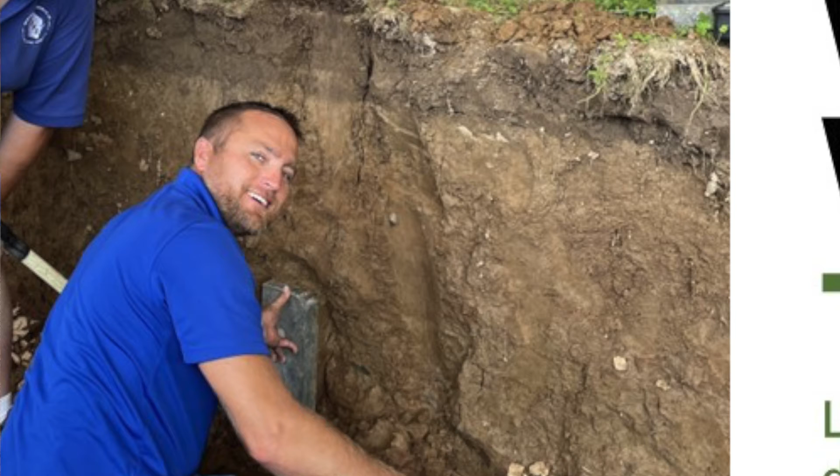And for those of you that really want to know what the next soil exam, what the next monolith is going to be, this is a picture of it. So, hurry up and do a screenshot, snap that, and you can study it if anybody needs to take the next soil exam. So there you go. Nope, too late. We're on to the next one.

So anyway, mobile home connections. One of these questions came up: who can connect a mobile home to a POWTS? So you're at a trailer park, manufactured home park. One trailer disappears, another trailer comes on. Who can make that service connection underneath there? It's a complicated answer. If a building sewer is present, then a master plumber restricted or master plumber can connect to it, or a journeyman can work on it too. If there's no building sewer, then only a master plumber.

From what I've heard, a lot of these pre-manufactured homes are being shipped without any building sewer underneath them. The plumbing goes through the bottom floor, and that's it, because they're not pre-plumbing them since they don't know which side of the building the sewer is going to go out. They don't know if they want to stub it out by the door, the back side, or the end. So they're just leaving it. If there is a building sewer underneath that manufactured home, the connection can be made by a restricted. But if you actually have to construct the building sewer, then it has to be done by a full master plumber. So either or, depending on what it is under there.

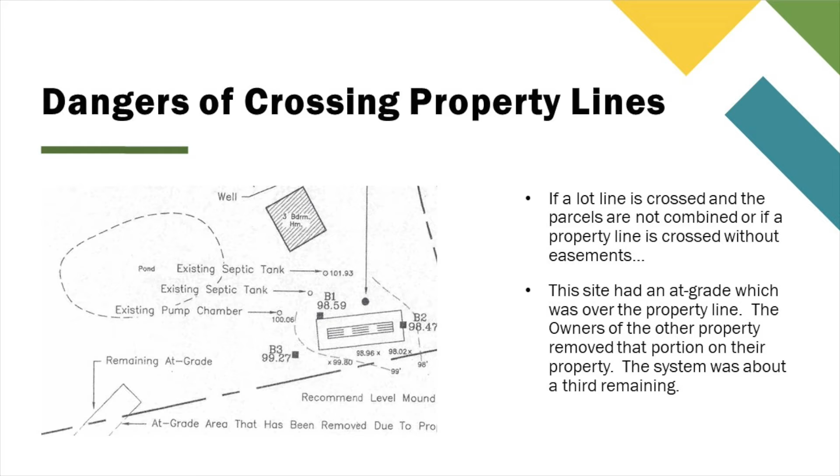So, what are some things that we look at? Well, one of the ways to do it is an easement. So, an easement basically gives access to another parcel.

And so how do we handle those? Well, we would like to say, if you own two, like the previous example a couple slides ago, where we looked at a guy who owns 3 lots but it's one tax ID, you should probably combine those. I mean, you can suggest it. We can't make it a requirement of issuing a sanitary permit or doing the plans. We can suggest it to them and say this would be for your benefit to do, but it's at their own detriment if they don't do that.

You know, requiring an easement, we've been told, well, years ago I was told from the attorney general opinion that we can't have an owner do an easement to themself. It's the strawman principle. It's like entering into a contract with yourself. You can't do an easement to yourself, but it'd probably be better to combine lots if they're not combined. But how do we handle easements?

So this gets into the issue of when we see a property come through with an easement on it, how do we handle those? Well, each easement can be different, as an individual can be. So some just require access, others limit use. So some may just say, hey, I've got the right for 2 rods width along this 40 acres to access my other property. So what does that mean? It might be walking access, might be a road. So it depends on what that easement allows them to do.

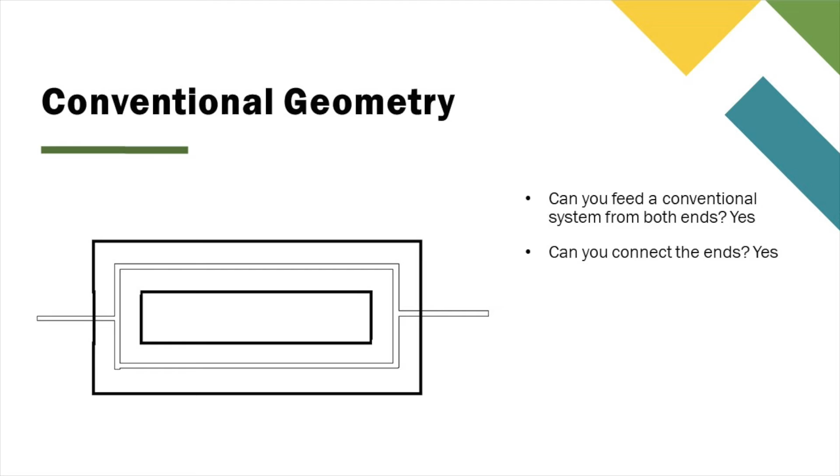What about an at-grade recore? So we had this question come in. Can I rebuild an at-grade? Can I do a recore like I do in a mound? Well, as an ISD, a submitter, you can propose basically anything. You have to show us that it meets the code. So even though it's not a component manual thing to do, you could do it as an ISD. You can propose a wide range of things. The problem that we had with an at-grade is that, in theory, yes, I can remove that material and rebuild it.

But unlike a mound, the biomat forms in a mound typically between the aggregate on top and where that sand interface is, much farther above the natural soil. And so those are sort of easy to take out the guts of the mound, so to speak, that biomat, that contaminated gravel, replace your distribution network and cell, and then cover it back up again.

The issue that we have with an at grade is that the biomat is at that aggregate bed and the natural soil interface where those two connect. So removing that biomat, which is possibly in the gravel and into the natural native soil, is a problem because now we're scraping that natural soil. When we do that, obviously, if it's a ponded system, it's going to be wet.

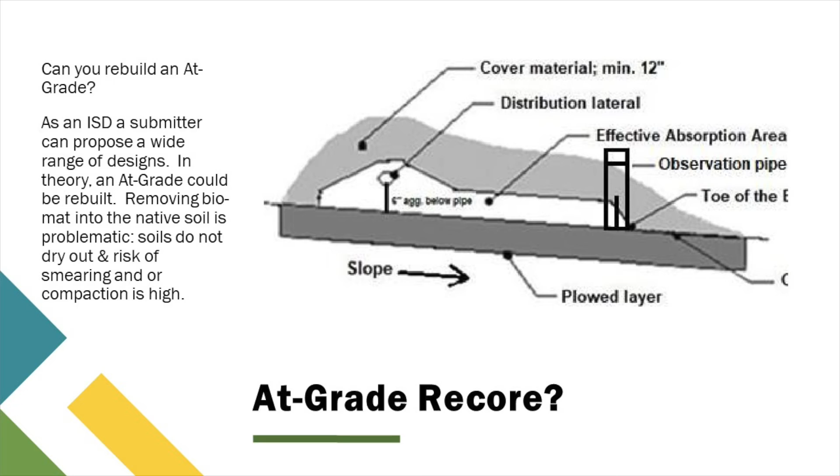But the question is, where can a garage floor drain discharge? So a residential floor drain is listed in table SPS 382.38-1. It lists the floor drains as discharging to, well, it's got a couple other ones that are combined sewer, but a sanitary sewer or a POWTS. So you can go down the sewer line with those. They may also be able to discharge to grade, but that's regulated by the DNR.

So I know we've had various people over the years that have talked to the DNR and gotten an exemption in writing from them that you can discharge to grade. That is a touch and go. Some DNR people have said, okay, that's not a problem. Other DNR people, because of the potential for contamination from whatever drippings off your vehicle, either oil or gasoline, say it's not a clear water discharge and has to be regulated through a permit. So depending on who you ask and when you ask, you may be able to get a piece of paper from the DNR saying that's okay.

Commercial floor drains are a different story. So if you've got a commercial garage, they're probably industrial wastewater and regulated by the DNR. There's a lot more propensity for vehicles to be stored and having mechanics work on them. The probability of having oil or antifreeze go down the drain is high, and those are most likely going to be industrial wastewater, and those can't go into a POWTS because we're going to have a contamination source, hazardous materials going in there, but those could go to a holding tank.

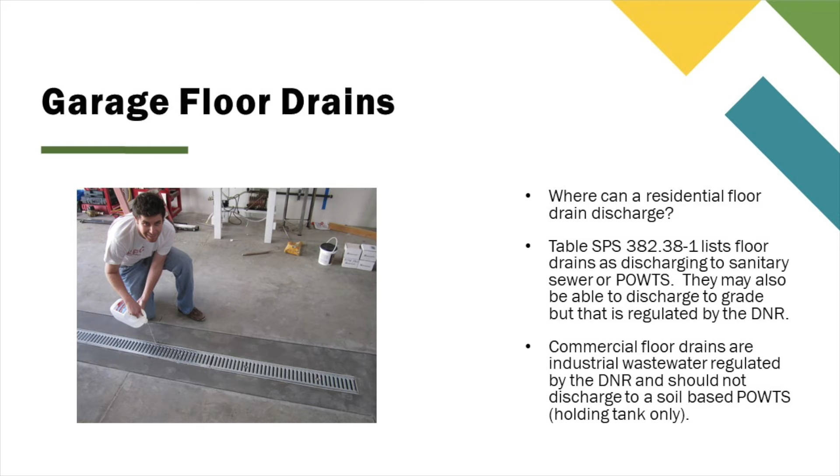So we're talking about recores. Probably should have had the slide next to it, but the question is, what about mound recores? When is it a good option? So we've had some of these come through here. I want to do a mound recore. Well, we have to make sure that the failure is at that distribution cell sand interface.

So where a recore makes sense is that over the years the biomat has eventually built up, it's plugged, the mound's 30, 35 years old or whatever, and we can core that material out, put a little bit of sand back down if we need it, add our distribution network again in the gravel, and put it back together. However, we've been running into some situations where it's not always up in that area.

Something occurred: either the soil test missed the structure issue, or this sort of leads towards possibly some issues during construction. Plowed when it was too wet, driven on and compacted while it was being constructed. Something happened during the construction phase, or there's a problem with the soil to start with. So even recoring it out on top isn't going to solve the problem down below.

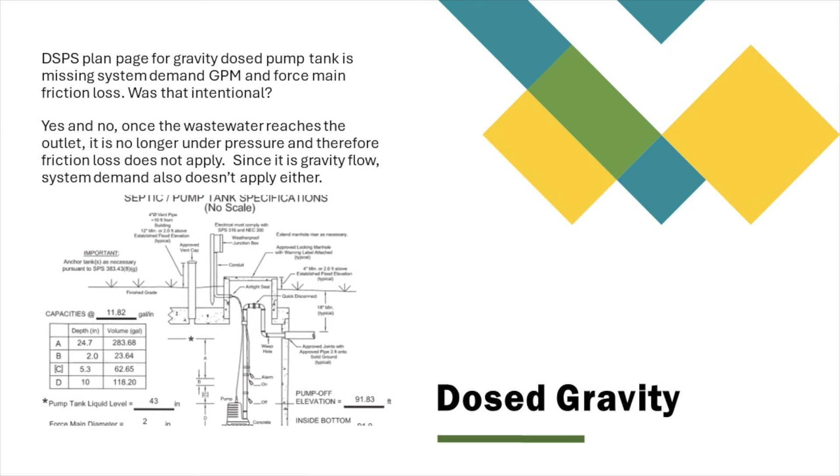So that brings us into total dynamic head and what are some of the calculations. So if we do have to do that, we've also had some questions about, again, calculating total dynamic head. We got some newer folks out there that are not always familiar with it. So I thought this would be a good time to go through some of those kind of things.

So total dynamic head is made up of basically 4 different parts. It's made up of distal pressure, so whatever your pressure distribution network requires. We have some network losses, we calculate as 30% of distal pressure. Vertical lift, which is the pump off to the highest point,

and then friction loss. As you have higher and higher velocity flow, you're going to have more and more friction against the walls of those pipe. It's going to be harder and harder to push. Also depends on the size of the pipe. So obviously, if I'm pushing at 40 gallons per minute through a 1 inch pipe, I'm going to have a lot of friction loss as opposed to 40 gallons per minute through a 6 inch pipe, for instance.

So during plan review, make sure that you check the calculations and verify the pump can meet the demand at the total dynamic head. So that's why we have the pump curves. You look at whatever the TDH is calculated, move it over to that line, look down, and verify that gallons per minute is being met.

Also during inspection, it's important to verify the elevations. Sometimes people get a little happy with their digging and the tank goes in deeper. And if you're close to that pump curve, you may need to make sure that they didn't dig in too deep or the system got moved a little bit or something happened, or the building sewer came out of the other side of the building and now you've got a longer force main. If you're close, check those numbers again, make sure that you're still within that pump curve.

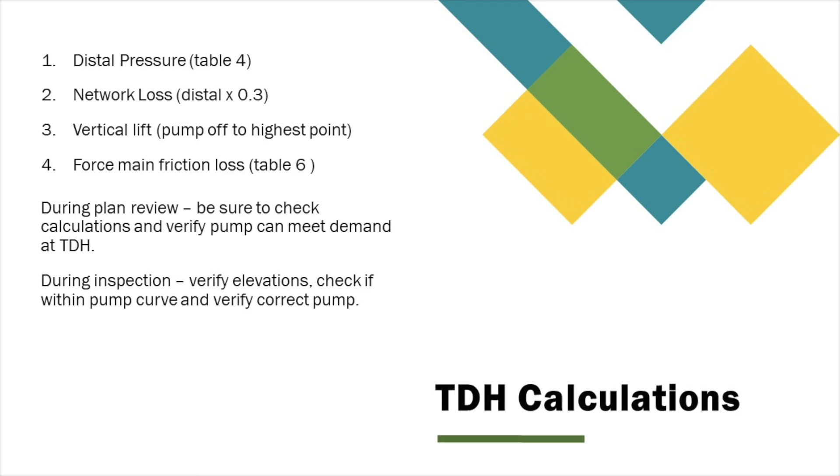So what are some, a little more detail? What are the parts? Distal pressure off of table 4. So this is their discharge rate, depending on what the size of the orifice diameter is. We require at least a 2.5 foot pressure. There may be some that are higher, such as a 5/32. You're going to have to use a 3.5 for a pressure. If you use 1/8 inch, it would be 5 feet of pressure would be the minimum required. So depending on which one, you're going to have a certain distal pressure.

Network loss, that's just for fittings, bends, elbows. We just figure an extra 30%. So you just add on, take your distal pressure times 0.3. So if you were using 5 times 0.3, you're going to have an extra 1.5 foot of pressure. So network loss is just distal times 0.3.

Vertical lift is, like I said, that gravity situation before, if we're only pumping to that outlet, you're only going from the pump to that outlet, and then if it's downhill from there, or if you're pumping up the hill to a mound or pumping up to a high point and then it goes over, it's whatever that high point is. So you have to determine whatever the highest point is. In this case, a mound would be the lateral invert. So that's the highest point you have to lift to.

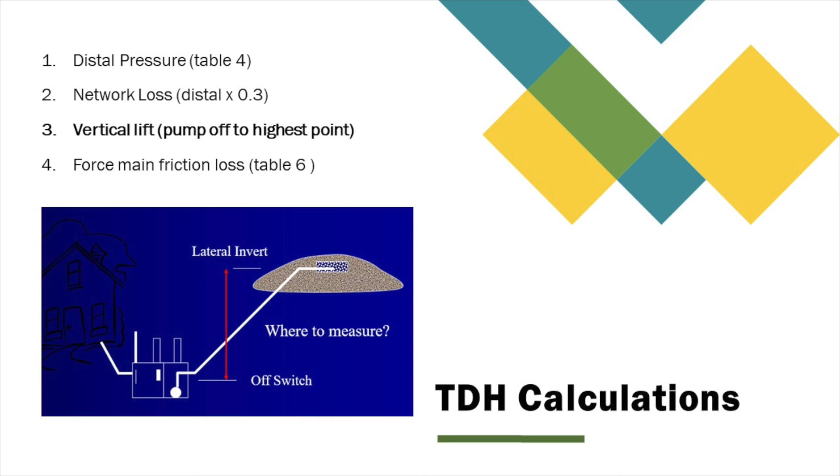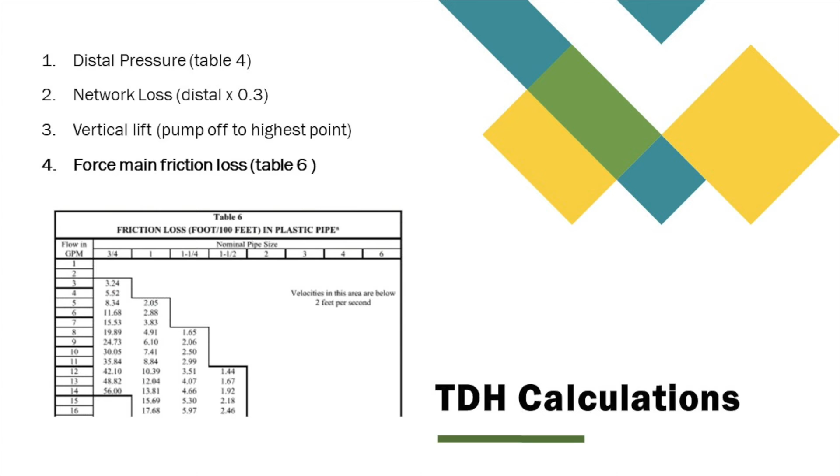So distal pressure plus network loss plus the vertical lift, and then the last component here would be your force main friction loss. So whatever your flow is in gallons per minute that's required, you would look at, and I don't really have part of the chart here, but then you look at whatever your pipe size is and you'd get a number here, and that's your friction loss per 100 feet of plastic pipe. You can extrapolate between the two if you're in between, or you can just take the higher number to make sure you're in. Hopefully, it's not going to make a difference where you're going to be right on that pump curve, but if you are, you can calculate that out.

The next question we had pop up, I had a county employee ask, he wanted to do, I think, a soil test for an acquaintance or friend of his, and said, where exactly can or can't I do a soil test on the side? So SPS 305.33(6) lists the requirement as a CST as an employee of a local governmental unit cannot perform soil evaluations in a county that they're employed in or adjacent counties.

So the way it's worded is basically if you share a border with that county, you can't work in that county. So, for instance, if you work in Door County, the only county that you share a border with is Kewaunee. So you cannot work in Door or Kewaunee County. If you're in a county that touches a lot, for instance, let's pick on one, let's say Sauk County, you cannot work in Sauk, Juneau, Vernon, Richland, Iowa, Dane, Columbia counties. So it's whatever county that you share a border with.

Whether or not Adams, I'd have to look at the map to see if they share a border. It looks like they're kitty corner. But it's whatever you share a border with. So you'd have to basically be one county away. So if you're in Sauk County, you could work in Marquette, even though it's fairly close. You don't share a border. Monroe County, you could work in. You don't share a border. As long as you're not sharing a border, you could hop over to that other county. So just something to be aware of if you are a county employee, what that requirement is.

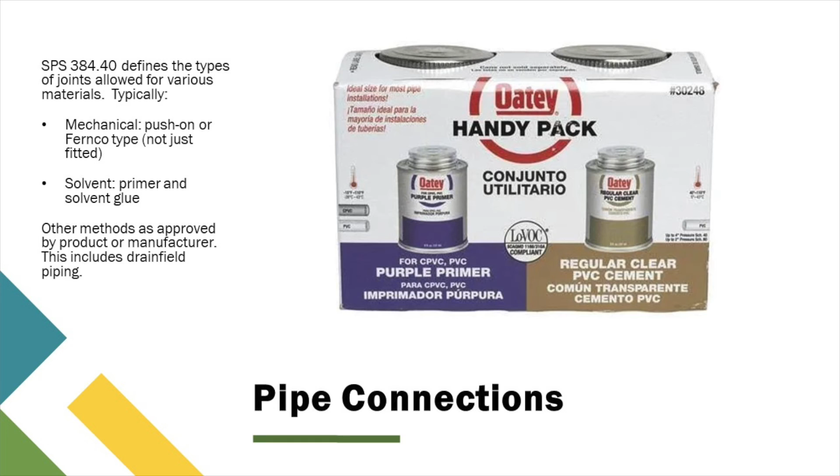As part of joints, make sure you know the difference between drain, waste, and vent versus pressure connections. We see this once in a while out in the field, that drain, waste, and vents are for only non-pressurized pipe, gravity. A lot of times the part that seals inside the fitting isn't very much. And so it's all right if it's not under pressure. There's enough contact area for the glue to hold if it's just a drain or a vent.

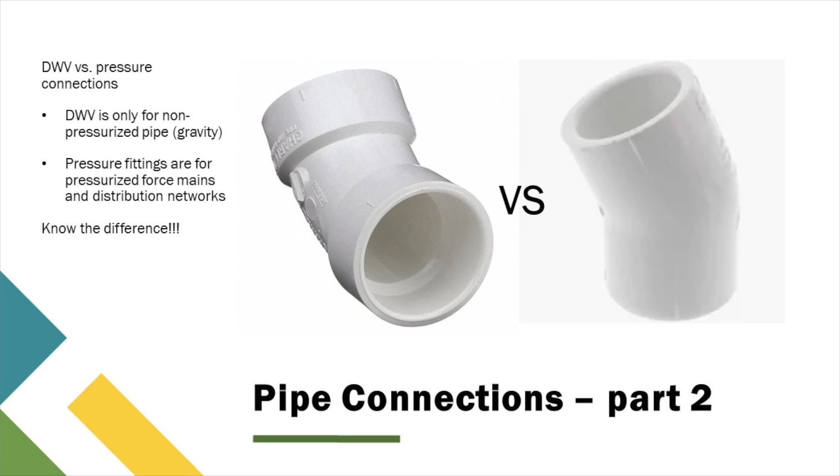But if it's under pressure, you need more contact. And so pressure fittings are usually a deeper socket. There's more sidewall for contact area for the glue to hold. So make sure as an installer and an inspector that we're using the right fittings there. That we're not using a drain waste vent fitting, that we're using a pressurized fitting for pressurized force mains and distribution networks. So make sure you know the difference on that for your pipe connections.

Private interceptor sewers, had some questions show up about that. When exactly do we have to look out for those? Private owned sewer connecting two or more buildings not controlled by a public authority. So, if it's the same building, two of them coming out, that's not defined as a private interceptor sewer. It functions as much, probably should still do the same things, but it's not called a private interceptor. But if it's two or more buildings that are connecting together, then it's a private interceptor. And if you're 4 inches or less, it can be reviewed as part of the POWTS submittal. They don't require a general plumbing review anymore. So it's been that way for a while.

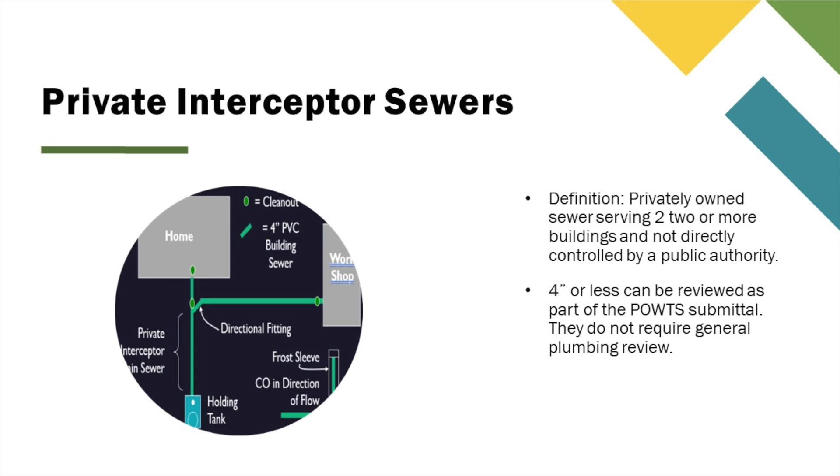But does something need to be recorded on the deed showing a private interceptor? If serving more than two one or two family dwellings and their accessory structures, then yes. So if it's just like this, a home and a workshop, no, nothing needs to be recorded. But if it's more than two one or two family dwellings and their accessory structures, then yes. We had one that came through where they put a drain in a bunch of storage buildings. Each storage unit was a separate building. They had it plumbed for a bathroom, I guess, or something. And so all these different sewer lines are all connected together. Those are private interceptors that had to be recorded on the deed.

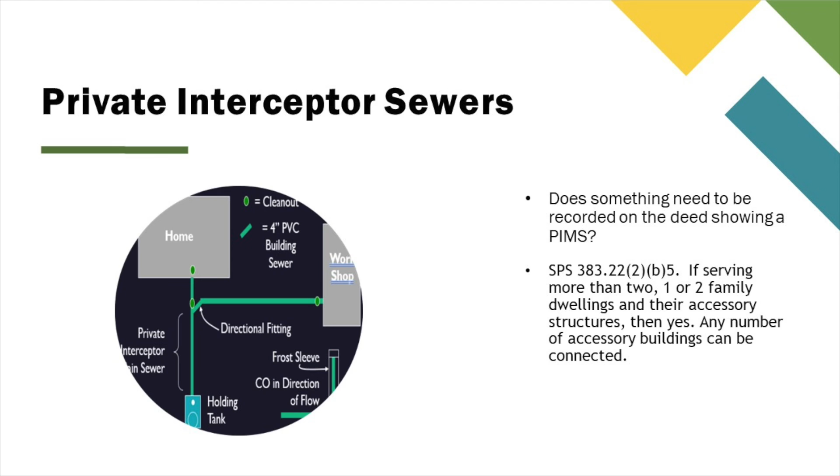And a lot of times, nationwide, we've seen some things come through where they're having some problems with them. They're actually considered hazardous waste, especially those that are heavy into the nails or heavy with the chemicals. So be aware that not all beauty salons are the same. If they're just doing haircuts and a wash, or it's a barbershop haircut and wash, that's okay. If they're doing other things, and again, what they're doing today may not be what they're doing tomorrow, but if they're doing perms, dyes, nails, things like that, you're probably best to direct them into a holding tank and then have that pumped out and dealt with separately. But even at that, you have to be careful that some of them may actually be hazardous waste. Treatment plants may not want to accept them.

State-owned property. Want to mention that we've been having some issues over the summer construction season. So facilities on state property or state-owned buildings are the jurisdiction of DSPS, not the counties. So everything still applies. Still need a soil test, still need a plan, still need a permit, still need an inspection, but those are all done at the state level. So plan review and permits are done through ESLA. You actually apply for a state sanitary permit through the ESLA program.

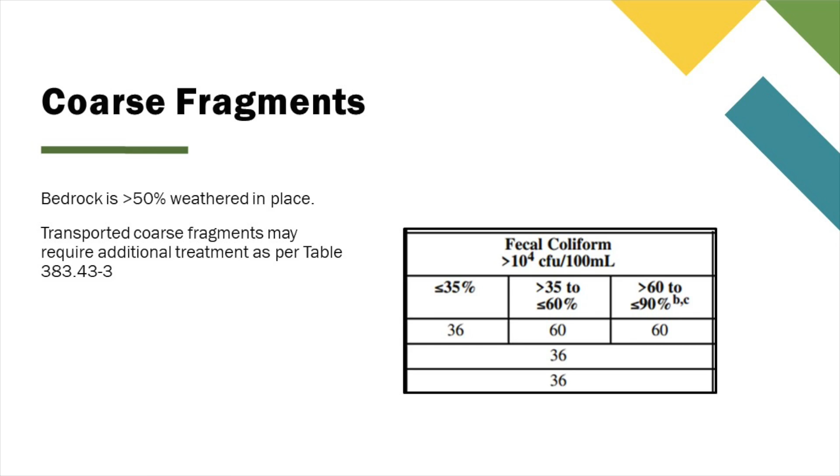So how do you do it when you've got big ones like this? Well, you can do a couple of different things. There's a tape measure at the top. You can just put the tape randomly up against the wall and use whatever percentages you want. Every inch that intercepts a stone or a coarse fragment, you can count how many times out of 10 inches that you encounter, or how many times out of 30 inches, and you can get a percentage that way. Do it a couple random ways. So there's ways to do it.

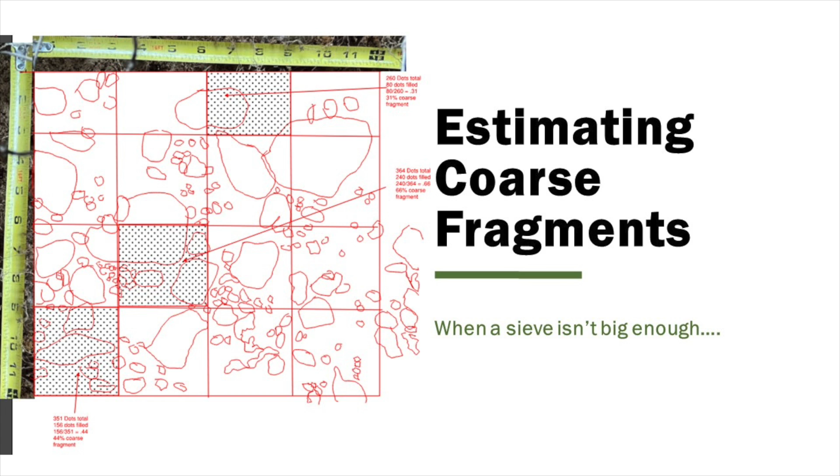Other ways that you can do it if you can't sieve out: take a picture, come back to the office, draw some circles around where the coarse fragments are, and then put a grid on it, and then do sort of the dot matrix thing and count. So in this box here, there's 364 dots total. 240 dots are on a fragment. That's 66% coarse fragments here, and do a couple different squares. This one is 31% fragments. This one is 44. Average those three together to determine, when a sieve isn't big enough. What are some other ways that I could do that?

Want to mention hydrograph update quick. For those of you affected in the hydrograph counties, which would be Adams, Juneau, Wood, Portage, and Waushara counties. DSPS is working with the affected counties. We've been gathering data. We're also working with Wisconsin Geological and Natural History Survey, that's WGNHS, to evaluate some data and get recommendations on how to proceed. They're going to be looking at some of our well data, some of the hydrology, and determining where our confidence levels are, what's going on with the groundwater flooding, the water elevations. As more information becomes available, we're going to share it with those affected counties and reach out to you guys.

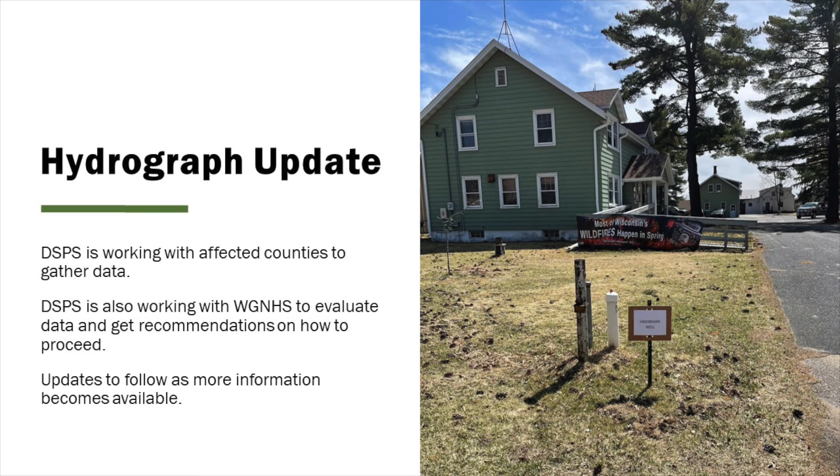A couple other things: ESLA now allows you to search by license only without knowing the type. We used to have to type in the number and then have the space dash space. Like master plumber restricted sewer is now plumber master restricted. They screwed some stuff up. So without having to know the license type, you can now search just by the number.

So something else to be aware of. Want to mention plan submittals. As the years have gone by, when submitting plans for review, be sure to include all supporting documents. Plans are getting unnecessarily placed on hold. So the ones we're really running into are two different things.

So if you're sending in a plan that had an IDR attached to it, interpretive determination report, the interpretive may have been done 2 months ago. It's without having that POWTS number for that interpretive. Either attach the interpretive as a PDF, or say what the POWTS number for the interpretive is. We've had some come through with no soils, no interpretive, and just say, here's the plan, not knowing the soils and the interpretive were already approved. You have to let the plan reviewer know what that is.

Also, if you're doing a revision, you need to include the POWTS number. I think there's a question for the revision in there, but still, tell us on the plan: this is the old POWTS number. This is what I did. I changed from whatever, EZflow to a pipe and gravel, or whatever the revision happens to be. Let us know, so that we're not spending all day re-reviewing stuff that doesn't need to be reviewed. We can just look at what the changes are.

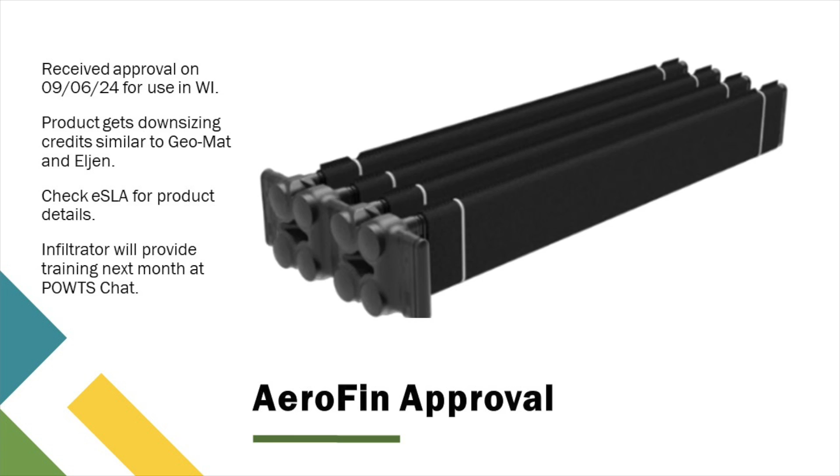Another product that has an update is White Knight did receive approval for commercial use in Wisconsin. It does not get any downsizing credits for commercial use. It just reduces commercial strength down to residential, but you don't get the downsizing credit for it. So it will be able to be used for commercial, but you're only taking commercial down to residential. Again, check eSLA for any details. Also, we had a question, can you use it for rejuvenation? Yes, you can still use it for rejuvenation with additional requirements for that.

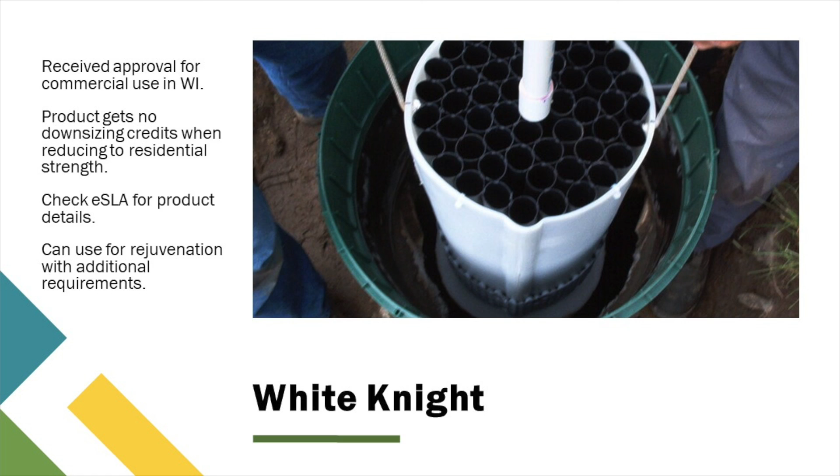Have a lot of questions. My name is floating around out there as a contact for Wisconsin Fund. It's okay, but I get a lot of questions on this. I think last week I received 7 calls on Wisconsin Fund. Again, Wisconsin Fund is set to end on June 30th of 2025. We're already in the final grant period, so we're already processing last year's installations.

So if systems installed this year want to apply for Wisconsin Fund, they would not get funded until after June 30th, which means there is none. So for systems installed this year, we're not going to be accepting any applications because it's not going to be funded. Wisconsin Fund has been revived at the last minute in previous budgets. I wouldn't count on that happening again. If it does, we'll deal with it, but don't plan on it being reinstituted. But what are some other things that you can do?

One of the things I learned at Farm Tech Days is that right next to us, USDA Rural Development, Rural Housing Program, had a table and they shared some information with me. So they have some programs to help people out for low income. Grants available for people age 62 and up. Loans can be at any age. And you can see they can give up to $40,000, 20-year loans, 1% interest. So there are programs out there for people. And this is not just for septics, but septics, wells, roof, windows, whatever. So any kind of health and safety hazard things that have to be addressed.